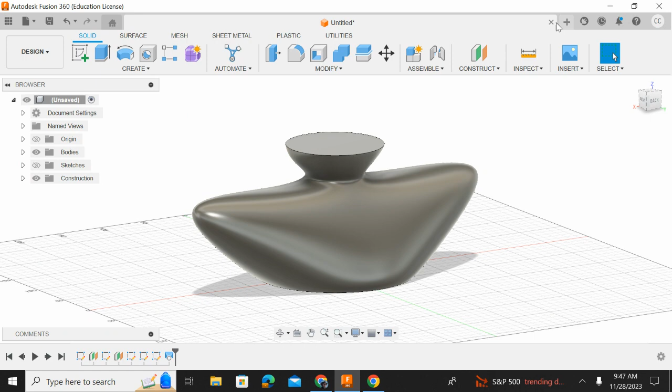This is one I made last class. Let's get rid of this thing. Oh, what an ugly thing. Let's say don't save. Okay.

All right, so we're going to start a sketch. We're using what's called the lofting tool. Because I want to make a coffee cup that's going to go up, I'm going to start my sketch on the flat bottom plane.

Right, Amadou? Yeah, stay awake buddy. So now that's immortalized in the video that I'm telling you to wake up. Isn't that great? Okay.

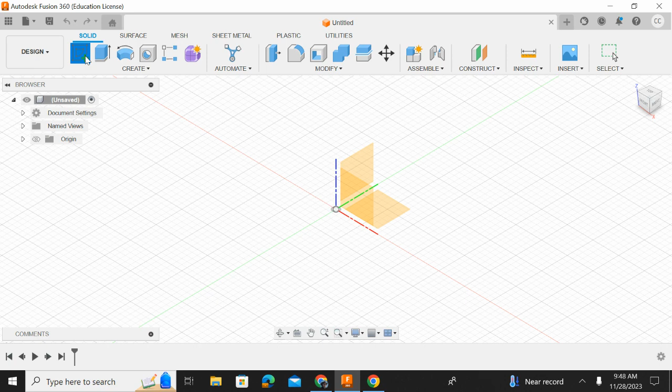Fix that right now, get out of your chair. Fix those chairs, that ruins my chairs. They're brand new, come on.

Okay, so let's make our sketch on the bottom plane here. Okay, how big do we want our coffee cup to be?

Let's grab a ruler. Has anyone got like a cup or a bottle or something that we could drink out of? Anybody? Well hey, over here I have my emergency backup coffee cup. You're having that for it.

Okay, so I'm going to measure this with the ruler. The bottom of this one is about 57 millimeters. The top of it is 97 millimeters. But I kind of want the opposite of this, right? I want it wide on the bottom and narrow on the top.

Okay, so I said 97 on the bottom, something like that. So let's make a circle on the bottom. You know, 97 begs to be rounded, right? Let's make it 100. Okay, so now we've got our measurement.

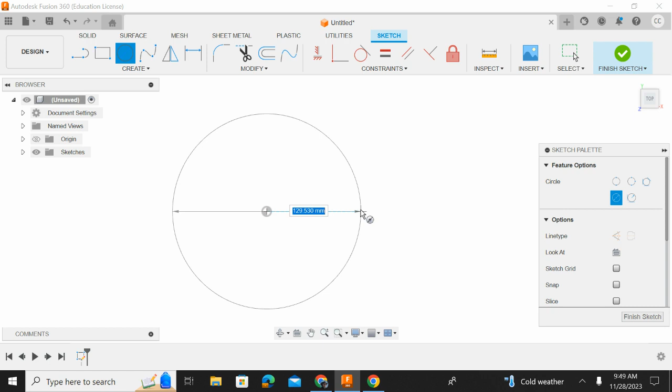Go to our origin point. Let's draw this to be 100. 100. Okay, finish sketch. Great.

Could I make a coffee cup just by extruding this and then shelling it? Yeah, all right, so we could do that. So let's remember what we've done here. We could extrude this thing up here.

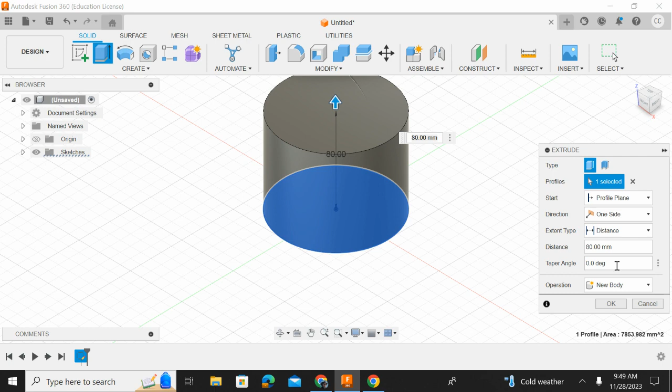And if I wanted to really get that tapered look I was going for, do you guys know that you can do a taper here? You can add an angle, you can say I want this tapered 30 degrees. Or wait, let's go the other way, negative 30 degrees. No, not 30. How about 15? Not 150, that's crazy.

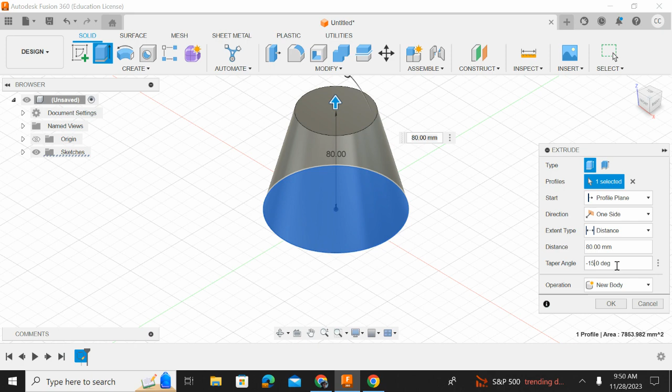All right, so yes, I could make a coffee cup this way, but I'm not going to have the control that I want. Okay, so we're going to say cancel. Okay, instead let's...

You know what, I can't loft yet. To loft, I need 2 sketches to loft to, a minimum of 2. So there's a skill here that you have to learn. It's called offset plane, we talked about it last time.

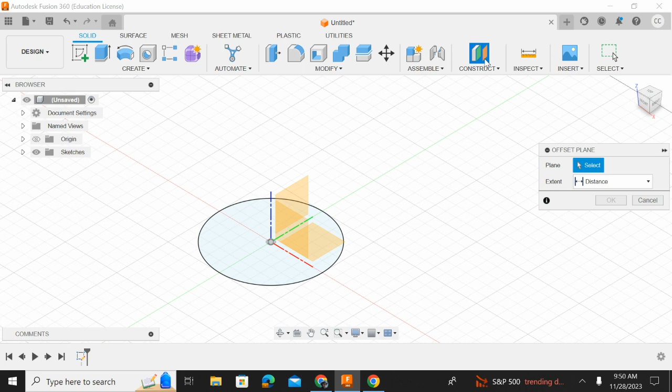So look over here where it says construct. This is a huge menu, don't look at that menu. Just hit the button, because offset plane is the one you use all the time. You point at the sketch that I want to do, and I'm going to point at that sketch, and then I'm going to pull it up.

Now here, let me show you what this looks like from the right. So I'm going to go to the view cube over here, I'm going to click right. Do you guys kind of see that I'm having this plane that's just kind of above the other plane?

So hey, our coffee cup, this whole thing is a little bit of measurement. That's about 10 centimeters, 100 millimeters. Do you guys like big coffee cups or little coffee cups?

I love those really big, massive ones, like the big 20-ouncer ones. So I'm going to go for a big coffee cup here. This is 100 millimeters tall. I think that's a little crazy, let's go for like 140.

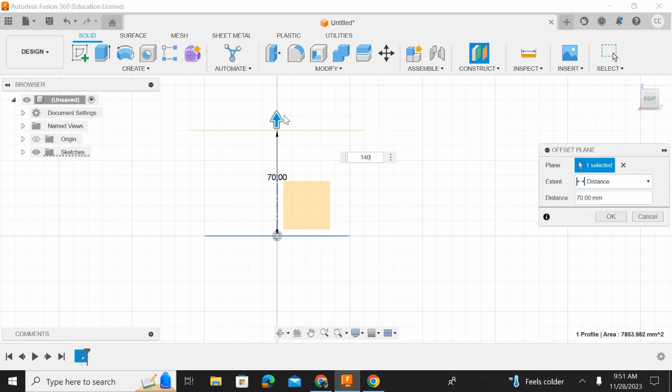So let's bring this up to 140. Zoom out a little bit. Okay, that looks really tall too. I'll click OK, and click my home button. There we go. So I need to draw another sketch, but now I can draw it on that new plane.

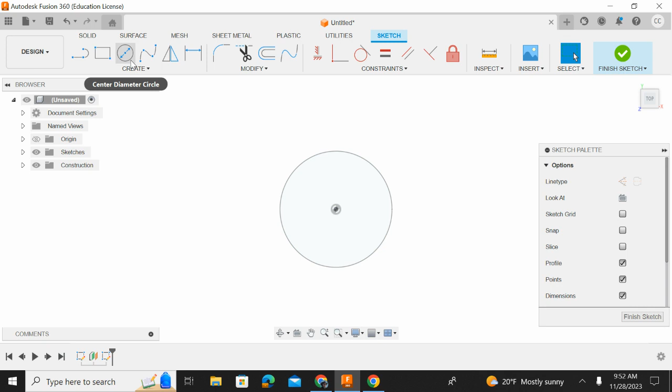I can see the circle under it, and that circle is going to be the wide bottom, and I need a narrow top. So let's create a circle for the top. We'll hit the origin. Do you guys see why it's like if you always click on the origin, it kind of centers all your stuff?

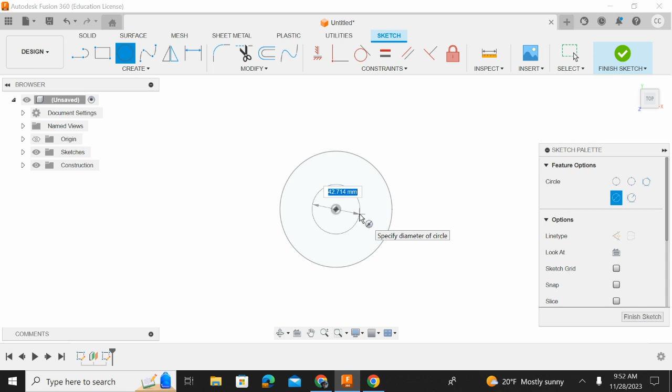How wide? I'm like, this is my mouth. My mouth is about that wide. We'll measure that. Looks like I am a big mouth crazy person. We're going to go with 70 millimeters. It's a little bit of a round, but that's fine.

Okay, I'm going to finish my sketch. Do you guys see that I've got two different circles on two different planes?

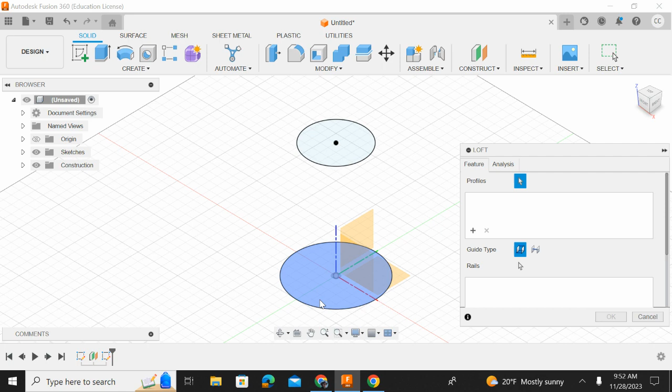We can loft. Let's make a loft. So we go to create, we go to loft. I'll go from the bottom one to the top one. You always want to go in order. If you go out of order, especially when you have a lot of planes going on, it's going to freak out. So make sure you go in order, like bottom to top or top to bottom.

And then I'll click okay, we're going to ignore the bottom for a second. There we go, I have a loft. Pretty simple, right? Where this gets interesting is when I realize that that is the ugliest coffee cup I've ever seen, and I need to fix it.

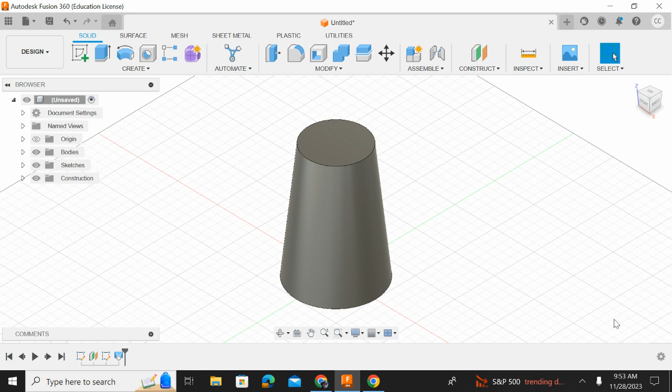But I said I wanted a coffee cup that's really wide on the bottom. So, okay, what's really wide? I think, what did we say the bottom? You know what, let's just Control Z, go back to here. I want to edit this sketch, so I go down here to the bottom.

I said 100. What is 100? 100 is a decent size. Actually, let's go up to 130. We're going to make it really wide on the bottom. I want like if it's in the car and the car is bouncing all over the place, or if you're in a boat and the boat's rocking, that it would just stay put, would never tip over. So let's bump this up to 140.

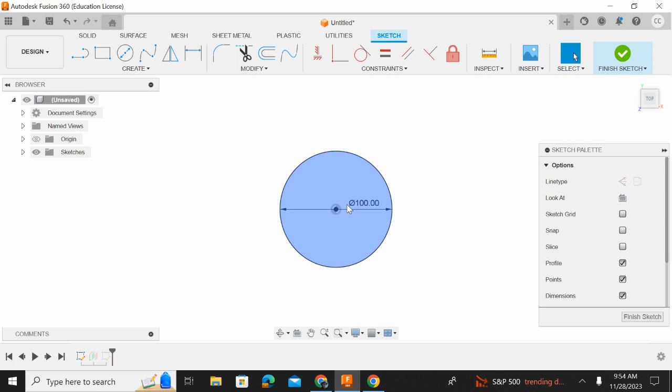Okay, we'll finish my sketch. Okay, I like that better. And that's how tall I want the whole thing to be.

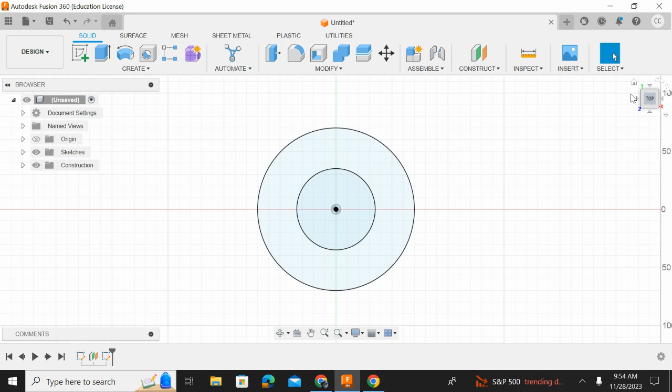But wait a second, do you guys remember our original design idea here? It kind of goes up to a narrow point and then widens out a little bit. Well, if I look at this from the top, I think I've got the mouthpiece right where I want it, but I need it to kind of choke down to a little point so the coffee doesn't spill out if it gets sloshed.

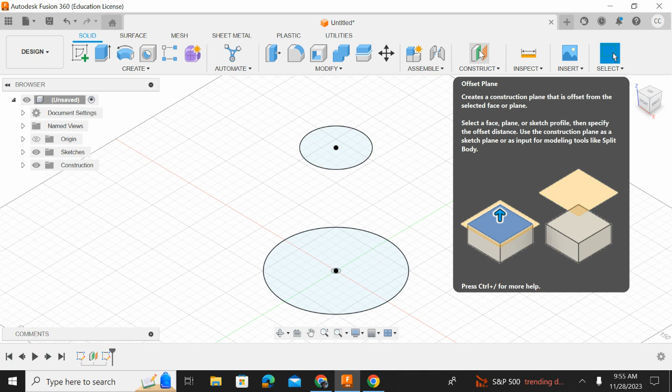All right, what do we do here? Well, if I want to draw a circle between these two circles, what was that tool that we used to make another thing to draw on? You guys remember? Construct. Nice, it's technically offset plane in the construct menu. Very good, you guys are on top of it.

I'm going to go ahead and click the bottom again. I like looking at this from the side because I think it's just easier to get a perspective. And I like, that's 100 millimeters, I'm eyeballing it right now. I kind of like it that big, so I'll make it 100.

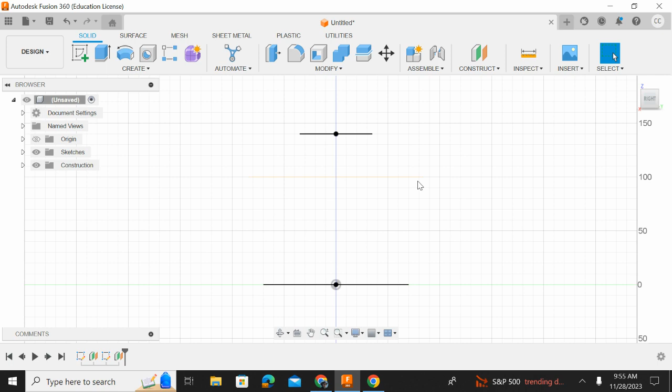Okay, now I have my plane. I want to draw on it, so I'm going to create a sketch.

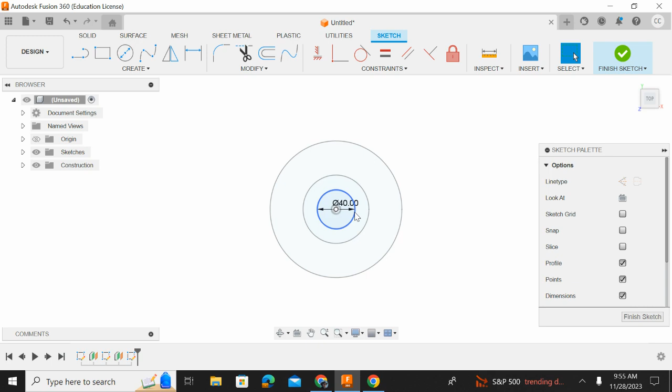Now you got to be careful that you draw on the plane and not on a previous sketch. Click on that. Now this time I want the circle to be smaller than my top circle, just the small circle. So I'm going to create a circle, go to the origin point, and this time make it 40, because I just want it to be narrower. Okay, finish my sketch.

Is it starting to take shape in your mind yet? Yeah, okay, I have this idea. It's going to kind of come to a cone and then come out a little bit, right? Because I'm trying to match kind of this shape, but not so ceramic. All right, let's do it.

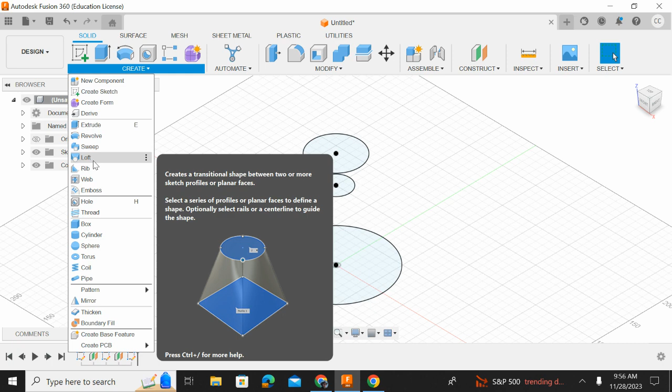We go to create sketch. Oh sorry, not create sketch, create a loft, my bad. Go from the bottom to the top or the top to the bottom. I like to go from the bottom to the top.

Ooh, I like that. Whoa, I kind of like that, but it's not what I'm going to hit OK, so we can look at it. Is that the shape I said I wanted? No, but can you see how it's trying to give me the most rounded shape between my profiles? Okay, this is what Loft does. The computer is trying to think for you. Computers can't think for you. You have to tell the computer how to think.

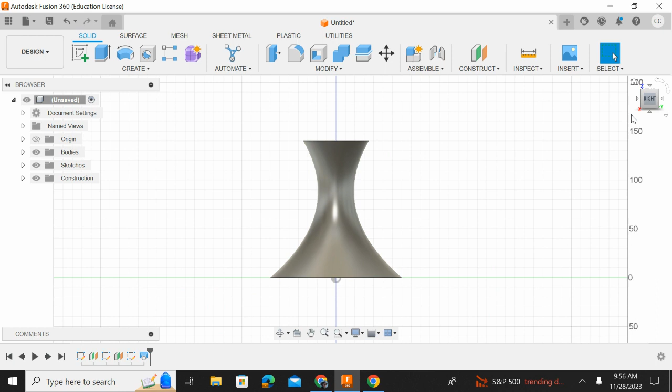Let's try again. Okay, so I think I have the shape I want. And I can always go back and change it later, but I have the shape I want.

Okay, but I need it to look like a coffee cup and not like a vase. So what do I add? Something called a rail. Now, to add a rail, this is where if you're ignoring me over there in the corners, y'all in the back sitting on your cell phones hoping I don't see you, or you guys sleeping up here in the front, like, if you ignore this, this is the critical part of making a loft.

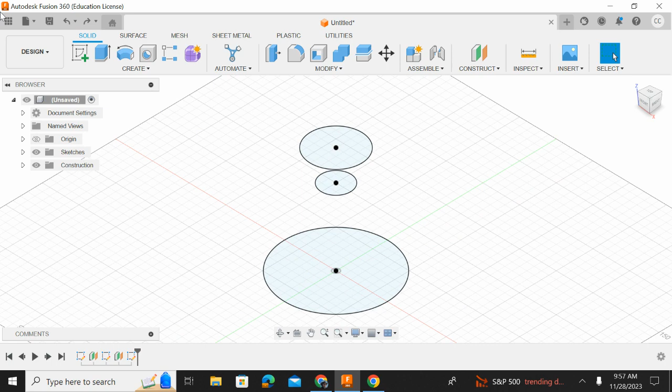This part, that's easy, you can do that in your sleep. Here's the hard part. You have to make a sketch on a plane that intersects it in a perpendicular way. Watch this, watch this. See this origin over here? See how it's blinked off? Let's blink it back on. Okay, I need to make a plane. See, all these planes have been on the flat. I need a plane that's on the up and downs. I don't know, there's a better term for that.

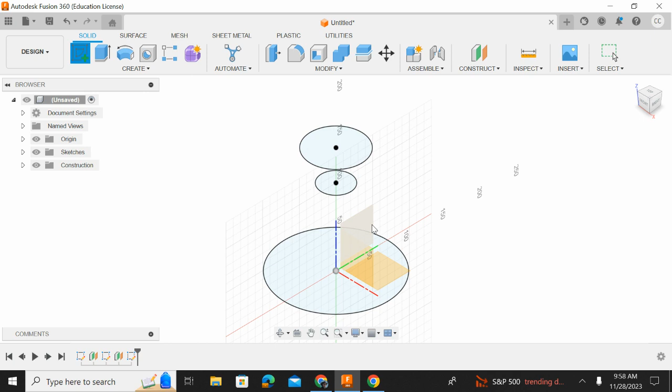So let's make a sketch on one of these. Okay, let's see, I forget, I don't know which one this is. Inventor was better at that. But now I can draw on the side of it. You see that? Okay, I want to draw a line that's going to guide how it lofts. But to do that, I need the line to connect to all of these lines.

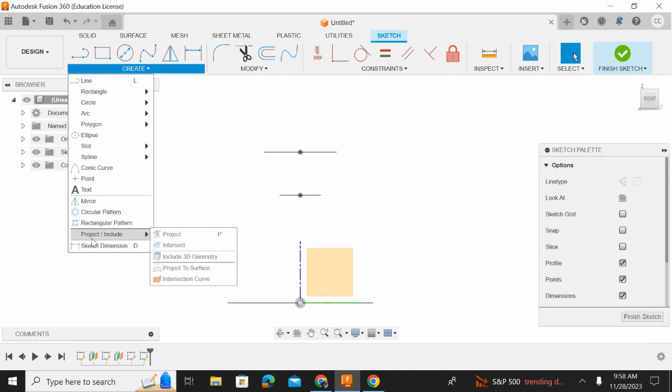Okay, if you go to the Create, come down here, it'll say Project. It's not Project, it's Project. Okay, and oh, look, it has the letter P there. That tells you that's a shortcut. So if I say, hey, project, and then I say P, I'm going to use P to project. I'm telling you that I'm using a shortcut. But I'm just going to click the button for now.

Okay, I want to project this line, and this line. That way, if I project these, I can draw on a line that I haven't even made yet into something. And that's helpful, because if these rails don't touch these lines, it will not work at all.

And you're going to be frustrated and angry. You're going to blame it all on Jacob. It's going to be completely his fault. So we can't let that happen. Jacob's self-esteem can't handle that.

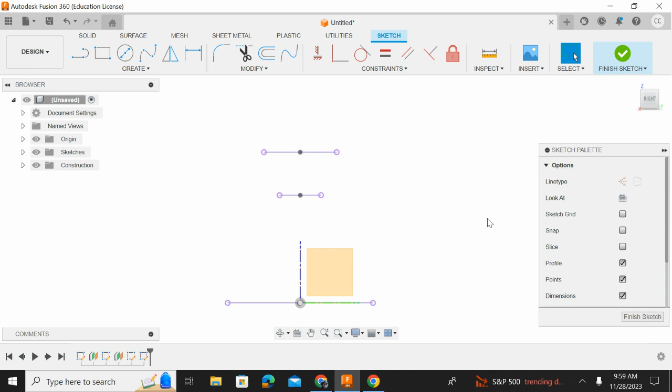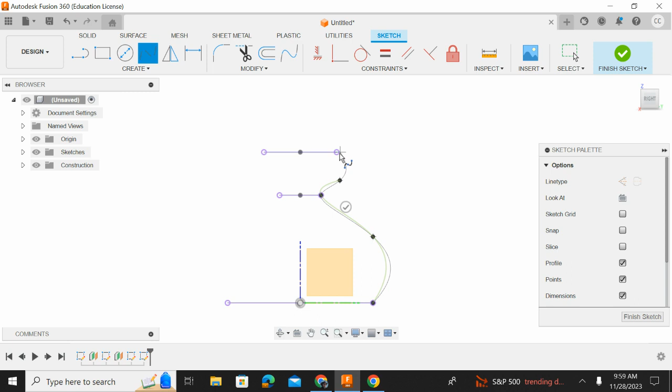So let's go in and draw some lines. All right, I could just straight up draw a line, but I really like, this is a great point for a spline. So I'm going to come in, and I want it to look like kind of like a coffee cup here a little bit. I'm going to click on this point, click once, click again, click once, click again. Okay, right click. Okay, does it look like a coffee cup?

Not really. But it's my coffee cup. I can do what I want.

So, but guess what? I can take these handles and turn stuff. You could go crazy with this. But I'm going to move this in just a little bit here, and then I'm going to bring this one in a little bit here. Click it again, and we'll alter it just a little bit. That's not bad, is it? Yes, it is. Okay. Stop. It's a coffee cup.

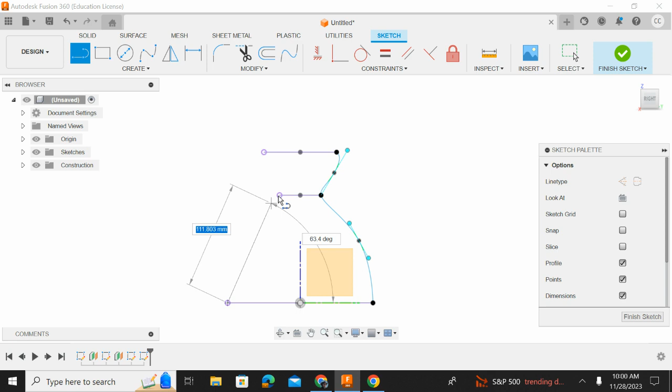Okay. So if I wanted to get a little bit more solid line, I could just use a line. I could connect here to here, and then connect here to there. I could do that too. I think that'll work. I've actually never tried to do that. Let's see if it'll work. So I'm going to finish my sketch.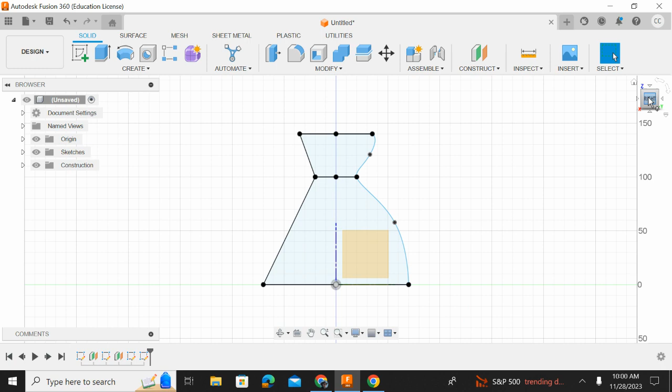All right. So I have my 3 circles, and then I have this kind of decoration on the side. But if you look at this side, there's nothing. Okay, so I have 2 rails. I have the 2 lines on the side. What am I going to do? Well, I'm going to make a loft.

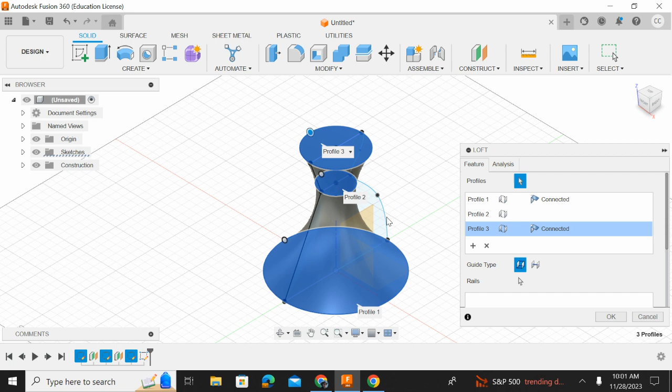Okay, remember, you start with your profiles, bottom one, middle one, the top one, and it gives me that kind of vasey shape. I'm not happy with that, so I'm going to come down here to where it says guide type. You could make a center line, but the rails are where we're at today. I'm going to point to those lines that I've already made. Let's see if it'll let me. Point to, nope.

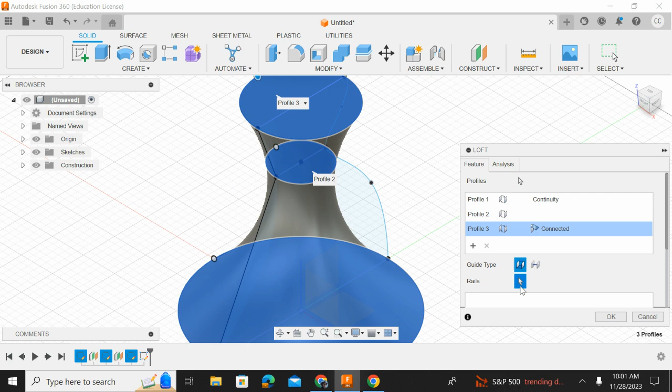Okay, if you get something like this, which is a warning, oh, this is what I did. I didn't click the arrow button here, and it thought I wanted to make that a profile, and it completely freaked out. So what do you do? You get rid of it. You hit the X to get rid of it. Let me come down here, select the arrow for rails. Oh, that works a lot better. Click my rail. Now I'm going to click my other rail as well.

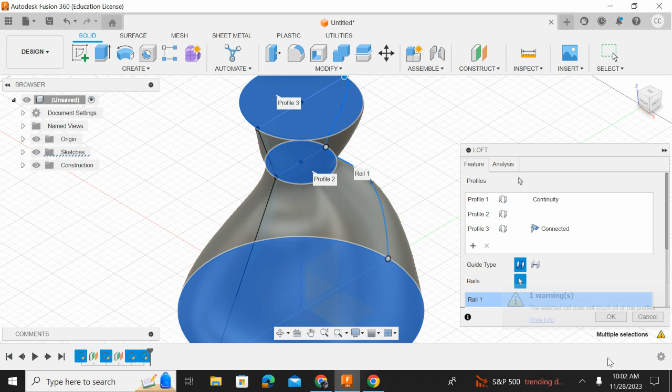Okay. The selected rail does not touch all of the profiles. So I cannot use lines because the line has to touch the whole thing. So line is out. I can't use the line. I'm going to be okay with that. I'll hit OK. And what did we get?

Oh my goodness, this is ugly. This is the goofiest coffee cup I've ever made, but I could probably make it a Statue of Liberty if I was trying hard. Okay. Certainly not the prettiest thing I've ever done, right? Okay. So what am I going to do? I'm actually going to hit Control-Z, and let's fix some stuff. We know that these lines aren't going to work, so let's delete the lines.

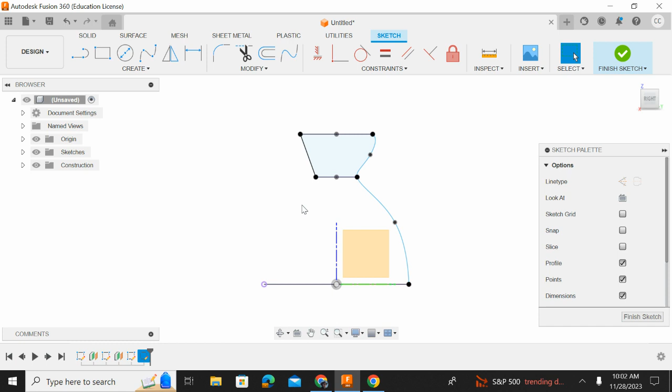But what if I wanted this to be perfectly symmetrical? How would I do that? Do you guys know a command that would work for that? Ooh, revolve would work, maybe, but that's not what we're going for. Good idea, though. I want these lines to be symmetrical, so I'm going to use this command called mirror. Okay? Mirror says I need an object and a line to mirror it over.

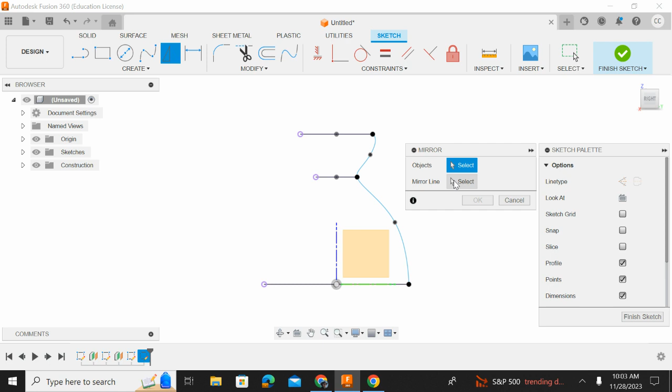But I don't have any lines to mirror on, so I need to make one of those first. I have the objects I want to mirror. So let's make a line to mirror. So let's create a line. I'm going to go from the bottom here to the top here. Okay. I'm going to right-click, and I'm going to say OK. Now I'm going to point to this line.

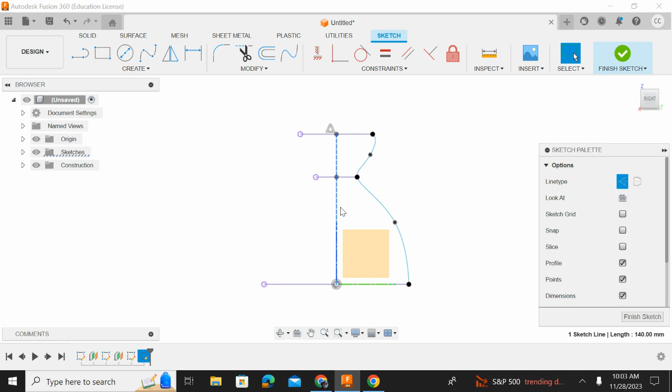And over here it says line type. I'm going to make it a construction line. I don't want it to be part of my object. I just want it to be there to help me draw. And the construction line helps you do that. Okay. All right, so now I have my object and I have my mirror line. So let's do that. Let's mirror. I'm going to select my object.

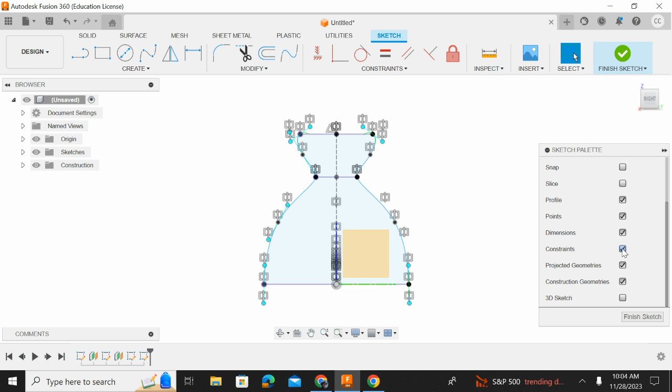My mirror line I'm going to select as this. Boom. Symmetrical. It's a really powerful tool for you guys to save you a lot of time, especially with these wonky shapes. All of these symbols mean it's just symmetrical. So if that's annoying you, you can come down to constraints, click that, and it'll turn off until you want to see it again. Now, if I did this right, if I alter this, it should change the other side. Aha! Woo! We could make a really weird coffee cup.

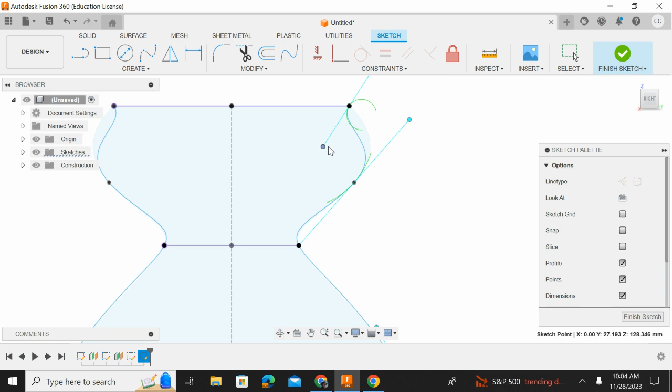Okay, so let me adjust my profile here. Ooh, I don't like that at all. Let's take that. Let's kind of like turn. Oh, no, you turn. Okay, don't turn. All right, somehow that got locked in. How about if I do, ooh. All right. Okay, I'm not going to get too crazy here. Let me go ahead and finish the sketch before I go nuts here.

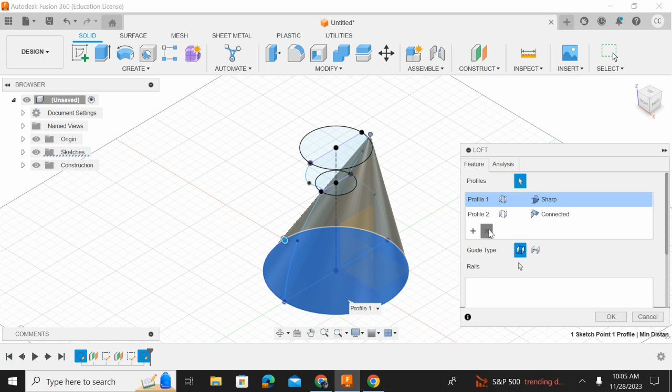We'll click our home. Okay, let's try our loft again. Sorry, I've started having way too much fun building. Whoa, that is not what. Oh, look at this. Somehow I've got a point on here that I did not want. So I'm going to go to profile 1. I'm going to X it. So I want the bottom one, the middle one, and the top one. We go back to our vase, click our rails arrow, click one side, click the other side, click OK.

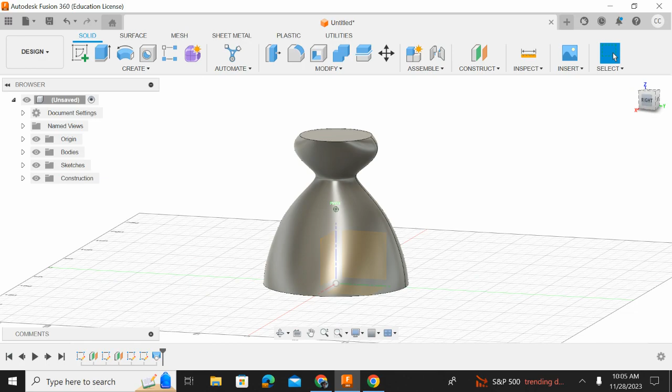And what did we get? Hey. There we go. It is a symmetrical shape. But is it symmetrical 360 around it? No. Oh, rats. What are we missing? Well, let's hit Control-Z and you guys tell me what's missing with our rails. What do we need more of? Rails. Okay. So we drew a sketch here going this way.

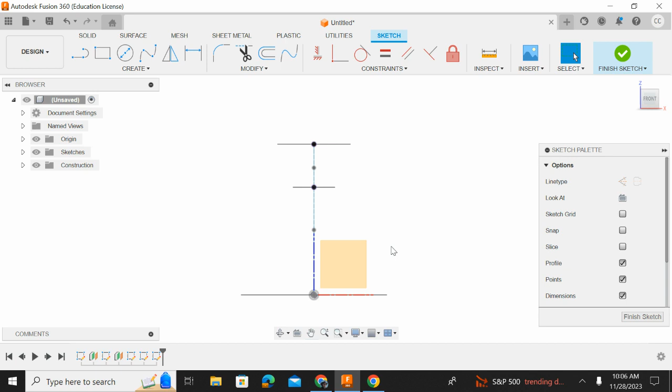Let's make a sketch on this one, going this way. Okay? Remember to project your geometry. I'm going to hit the letter P to project. That's the shortcut. Click that one, and this one. I'm going to click that line in the middle so I can just use that one again. And then let's draw some splines again. Try to duplicate this a little bit, but I don't want it to be exact, just so I could prove a point here.

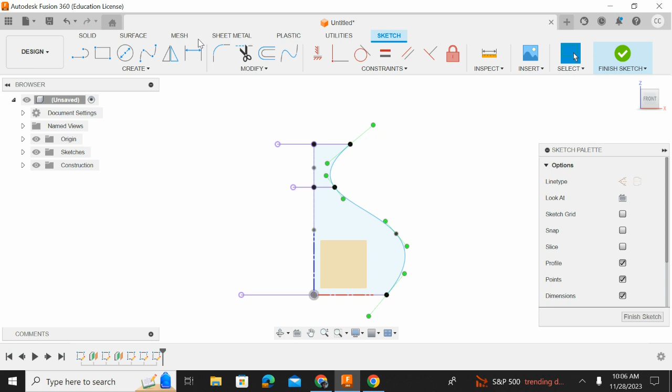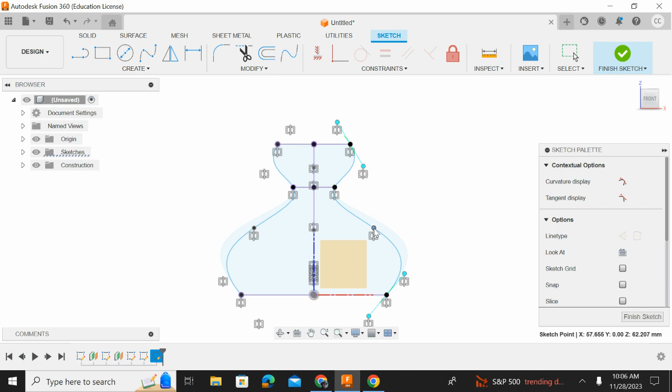Okay, and then, you know what? Let's mirror that line. Select this. Wait, I didn't do that right. Mirror, there we go. Select this. Select my line. There, click OK. All right, still a coffee cup. Kind of a shape. I'm going to bulge it out just a little bit there. And I'll bring this one here a little bit. All right, I'll finish my sketch. Now, my guide rails don't match at all, but that's going to be okay because we're not getting specific. We're just trying to learn how to loft.

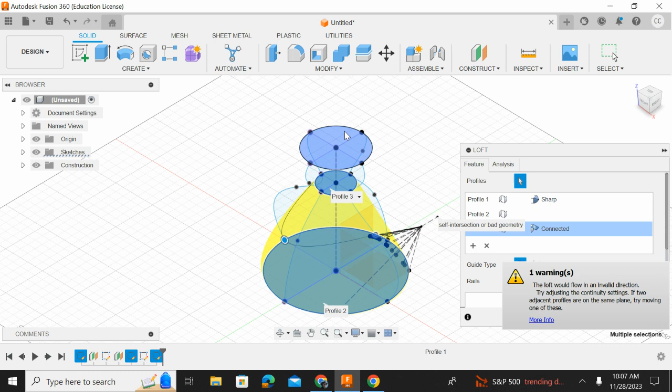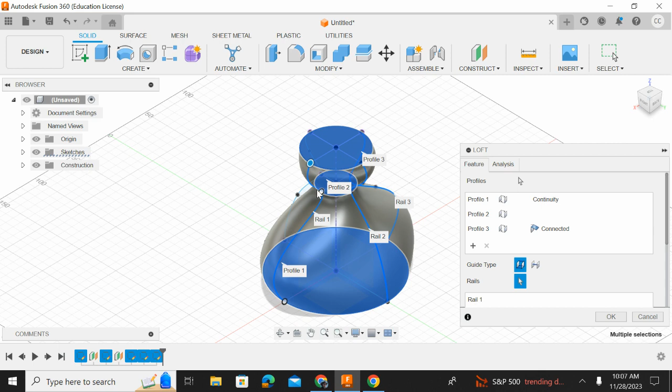Now, let's loft it and let's see if this works. So, create, loft, bottom, middle, top. Somehow I still messed this up. Profile 1 is sharp. Let's get rid of that one. There we go. Bottom, middle, top. And now I want my guide rails. Now you're going to have to be careful. You're going to have to probably move the thing around so you can select all of your rails. There's another one there. There, I have all my rails. Click OK. Aha! I've lofted a very strange coffee cup.

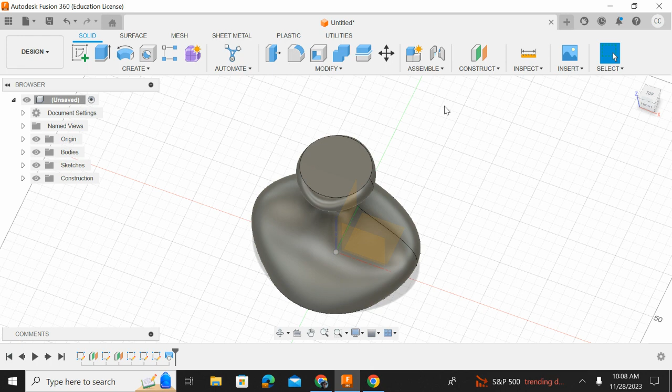Honestly, it looks more like a perfume bottle or the head of a mannequin. I'm not sure. But if I wanted to make it a coffee cup, hey, how do you make something hollow with a thickness? What was that command? Shell. Thank you. So let's try that. Let's shell this thing. I'll point to the top because I want it to be a coffee cup. I'm going to make it a little bit thicker because it's a coffee cup. I'm going to make it 3 millimeters.

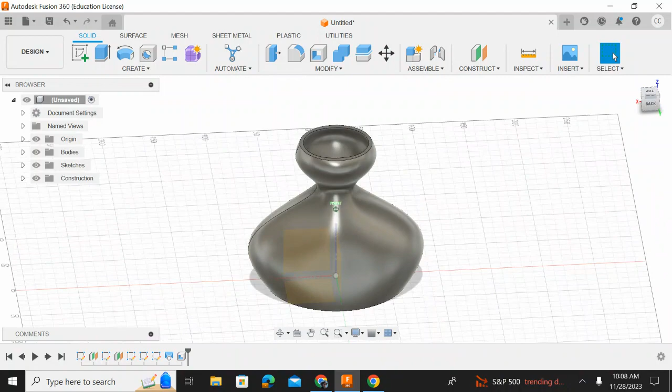There we go. And you can see now that this actually is hollow on the inside. I could easily print this and it would come out probably pretty well with the shape. It all has supported lines all underneath it. There you go. That is how to make a basic loft. Okay? You guys got any questions before I shut down the recording? Am I going to print this? Probably not, because I want to save the printing for y'all's time. So let's go.